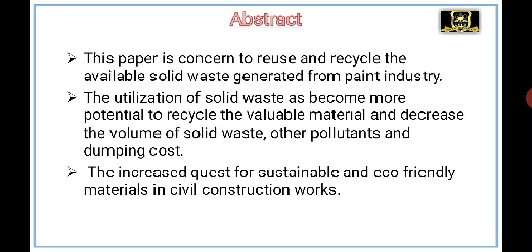Introduction: the present work discusses a new innovation of preparing bricks from solid waste and testing them against fire and other strength properties. Various concentrations in the environment may lead to degradation of the prevailing atmosphere.

Due to more improvement in using sustainable, low cost, eco friendly lightweight construction material, civil works has been emphasized to investigate the growing need to improve the quality of environment and to maintain material requirements as per standard. Large amounts of solid material are produced around the globe.

According to World Bank statistics on the global solid waste management sector, global cities are presently producing about 1.3 billion tons of solid waste every year, and it keeps recurring. This volume is expected to reach nearly 2.2 billion tons by the year 2025, and the waste accumulation rate is assumed to double over the next two decades.

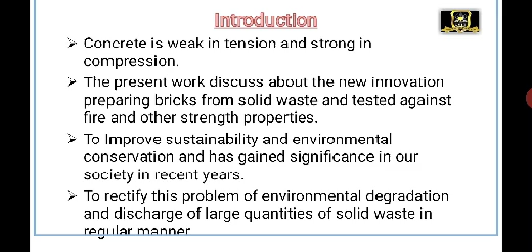Eco-friendly waste recycling has proved to be one of the best management methods to reduce and recycle waste in the research field. This management of solid waste reduces the negative impact of its disposal.

Materials used: first, solid waste paint or paint remnants. These are toxic but unwanted waste. This viscous slurry can be classified as hazardous waste. Therefore, if this waste is disposed of randomly on the surface, it might lead to degradation of soil fertility, making it toxic to agricultural land and even causing damage to the flora and fauna of the ecosystem where the waste is discharged.

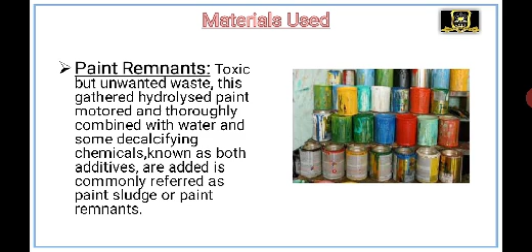Second, cement. Cement is commonly used in binding sand and gravel together. Cement grades manufactured for construction work are generally not organic in nature, usually lime or calcium silicate based compounds. Table number 1 shows the physical characteristics of cement; these are various tests we conducted in our laboratory, with results as shown below.

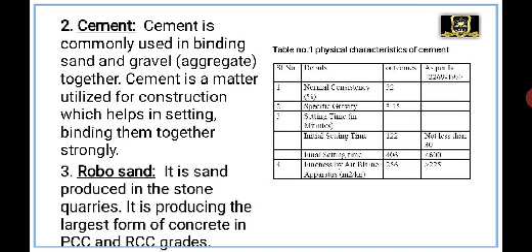Third, RoboSand. It is produced in stone quarries as a substitute for natural sand. The main advantages of RoboSand are cubical dimension, proper gradation, and lack of impurities. Fourth, fly ash. In preparation of bricks, the use of fly ash gives enough strength and decreases water. The strength of brick prepared from fly ash is comparatively higher than conventional bricks.

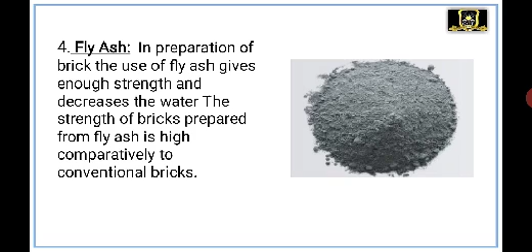Fifth, water. Potable water was used, which is generally available in college. Water used for these operations should be free from suspended and other impurities, and pH of water should be maintained within standard limits as prescribed by IS 456 2000.

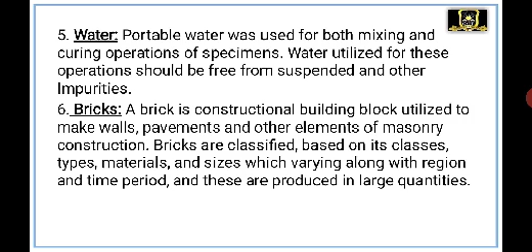Sixth, bricks. Brick is a constructional building block utilized to make walls, pavements, and other elements of masonry construction. Bricks are classified based on class, type, material, and size, which vary with region and time period, and are produced in large quantities.

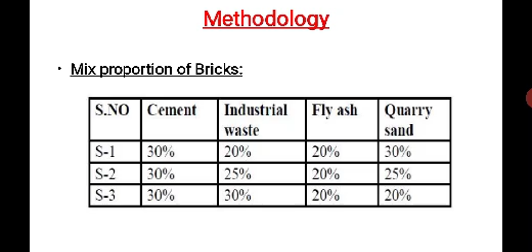Methodology: mix proportion of brick. The mixed proportion used for this experiment is shown in this picture. Cement is 30% for sample 1, sample 2, and sample 3. Industrial waste is 20% for sample 1, 25% for sample 2, 30% for sample 3. Fly ash is 20% for all three samples. Quarry sand is 30% for sample 1, 25% for sample 2, 20% for sample 3.

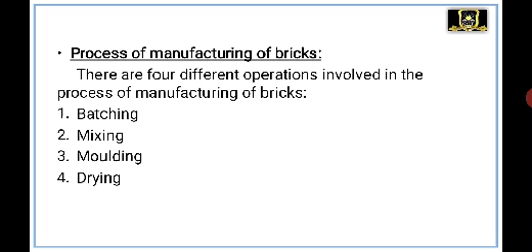Process of manufacturing bricks. There are four different operations involved: batching, mixing, molding, and drying. Batching is the accurate and precise measurement of materials for making cement.

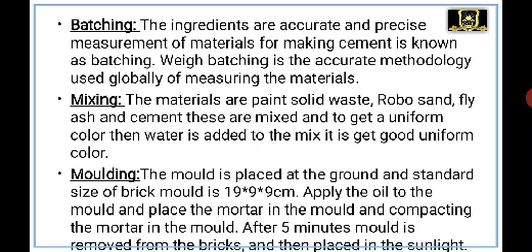Mixing: the materials used are paint solid waste, Robo sand, fly ash, and cement to get a uniform color, and then water is added to get a good uniform mix. Molding: the mold is placed on the ground, and the standard size of the brick mold is 19 by 9 by 9 centimeters.

Drying is done to avoid cracking or crumbling while handling and carrying in the construction phase. Drying is done in two ways: artificial drying and natural drying. Artificial drying involves burning bricks at an optimum temperature of about 1200 degrees Celsius in a tunnel-like structure where the temperature is maintained. Natural drying is done by exposing bricks to air circulation, generally avoiding direct sunlight.

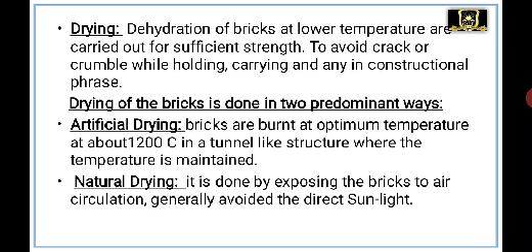Strength study on hardened concrete: compressive strength of concrete. A universal testing machine was used for this test. The compressive strength formula is shown in the picture, where F equals compressive strength of specimen in Newton per mm square, L equals load in Newton, and A equals cross sectional area in mm square.

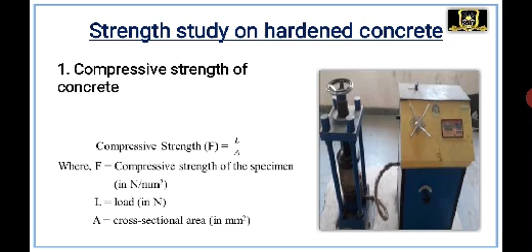Crushing strength is determined by placing the sample brick in a UTM and performing a compression test. After placing the brick in the UTM, gradual load is applied until the sample brick breaks. Then the value of the failure load is noted down and compressive strength is calculated.

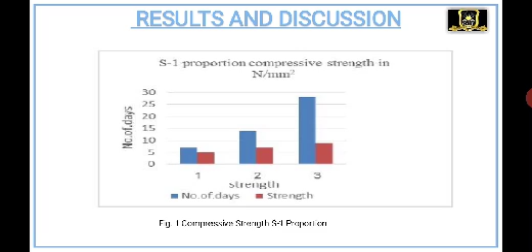Result and discussion: the test was conducted for three different samples with different mix proportions. The values were noted down and then the graph was plotted for each of the three samples, as shown in these pictures.

Conclusion: the minimum crushing strength of brick is calculated to be 3.50 Newton per mm square. Compared to normal brick, paint sludge brick is light in weight, making transportation easier. Bricks made from paint waste were found to have compressive strength greater than conventional bricks.